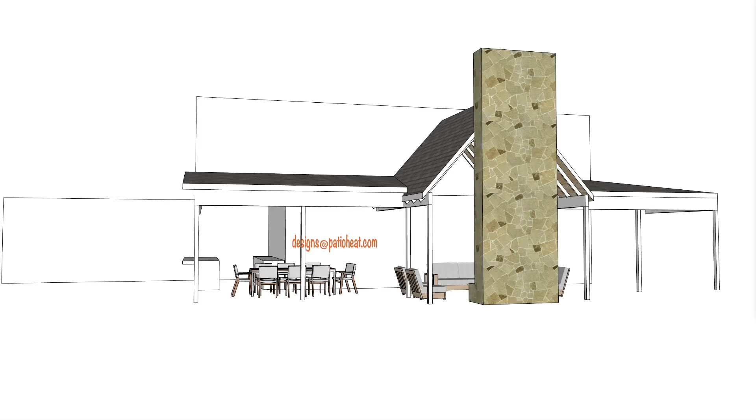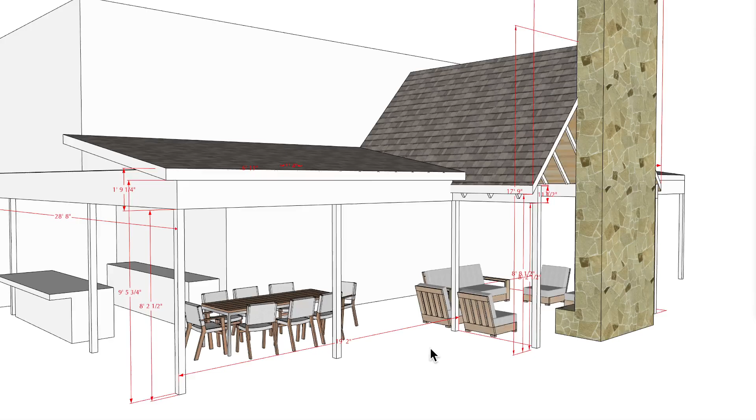Okay, so let's check out this particular application here. First, let's go into the overall dimensions. So overall dimensions I have, mainly it's 19 foot 2 inches from this outer post here to the outside post. I have a ceiling height here of about 9'5" and 3/4 of an inch rather. This section over here is 28 feet 8. However, we're not going to be heating up this space very much.

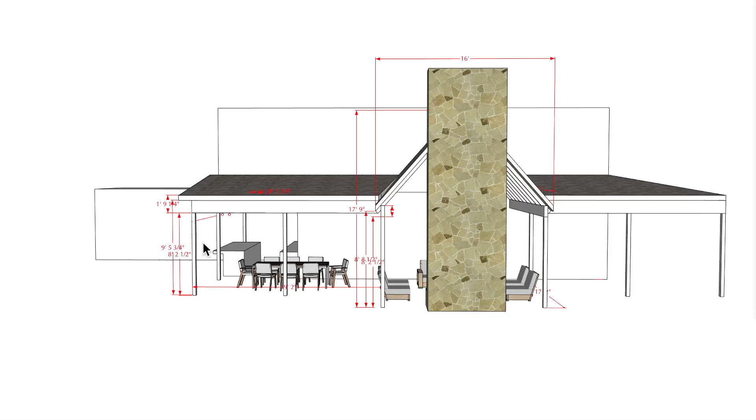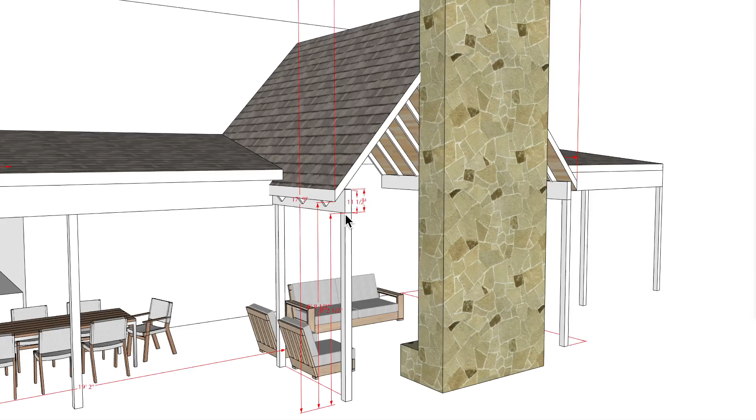We have 17 foot 2 from this outer edge here to the wall, and then we have a 16 foot section over here. Now there is some information that I received in reference to the height of the ceiling here. I have that at 17 foot 9 starting here. And then from this point here to the floor, I have that at 8 foot and 8.5 inches. Now, this dimension here is not going to be 100% accurate. However, I do have it about 12 inches roughly in height here. And I think that's about it as far as that is concerned.

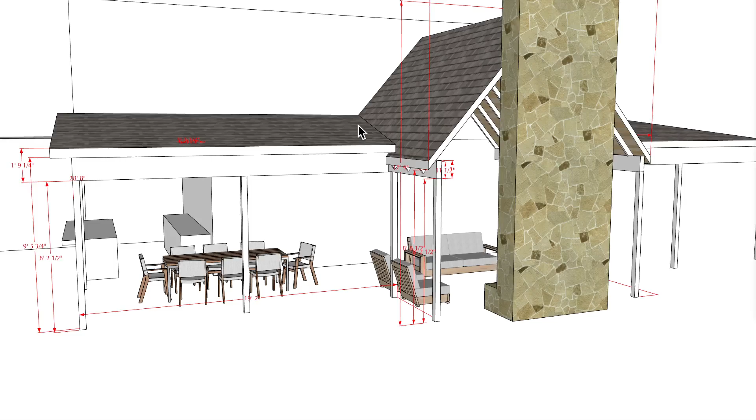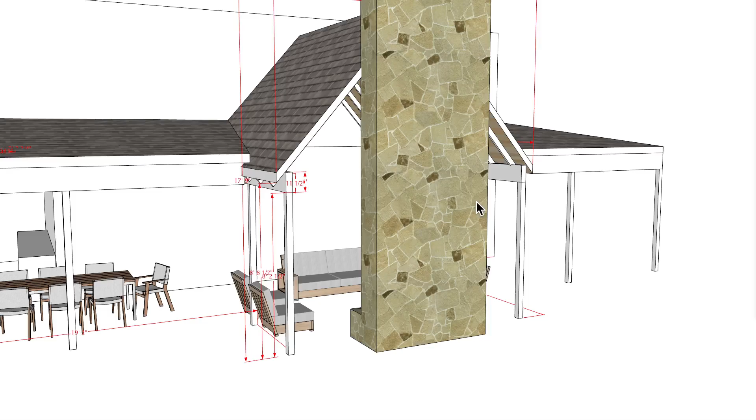Now, I think the beam will probably be pushed over to the left here a few inches and to the right over here a few inches. However, that's not going to make that big of an issue. The main part that we're going to be looking at is just the clearances around this edge over here. And let's go ahead and turn that dimension off and look at a couple of different options.

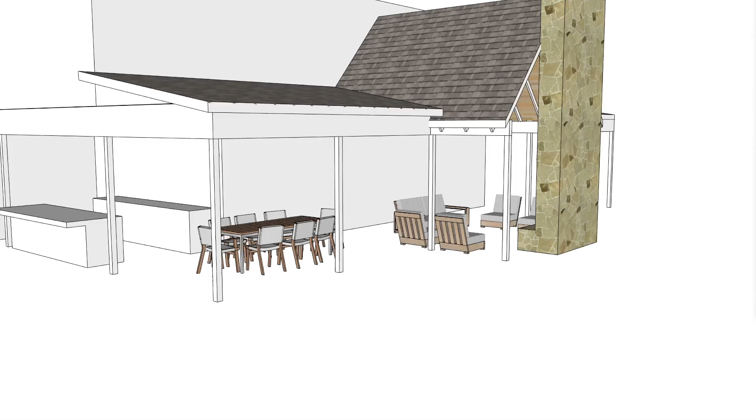So first of all, you can see that we have a seating area here that's casual seating. I have a fireplace sitting over here. We do have dining space over here. There's a bar over here, but we're going to look at that again as a future application. I'm going to remove the fireplace for right now, just so we can see how the heating system may work for this application.

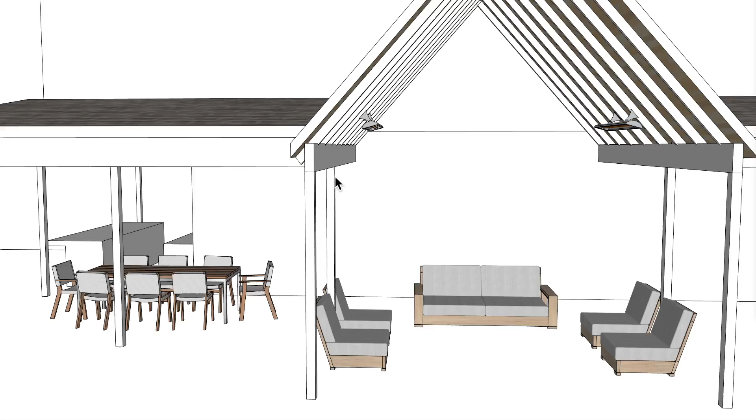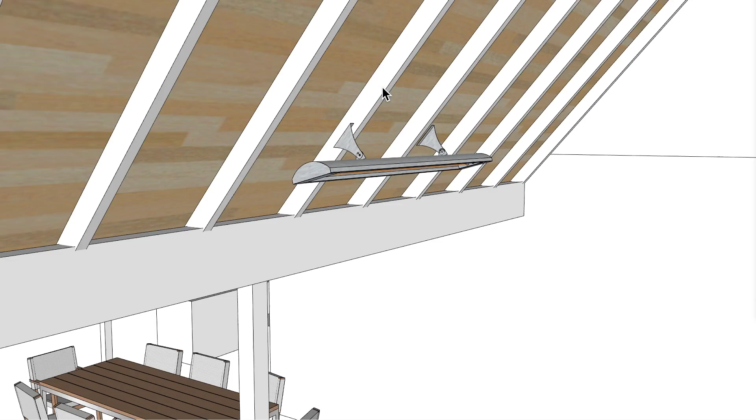So let's go ahead and look at one option that I would possibly recommend. And that would be two of the CD's 6024 6000 watt 240 volt 25 amp heaters, and I have them placed in such a manner. Now you can see that they're not attached to the ceiling joist here or rafter. However, I do have them in the same kind of position as the slope itself is concerned.

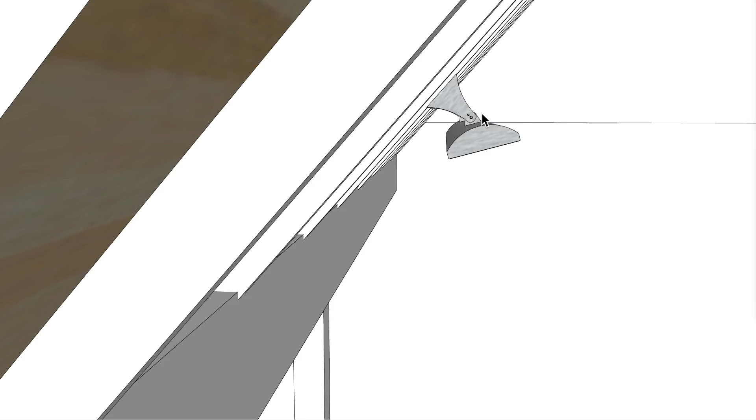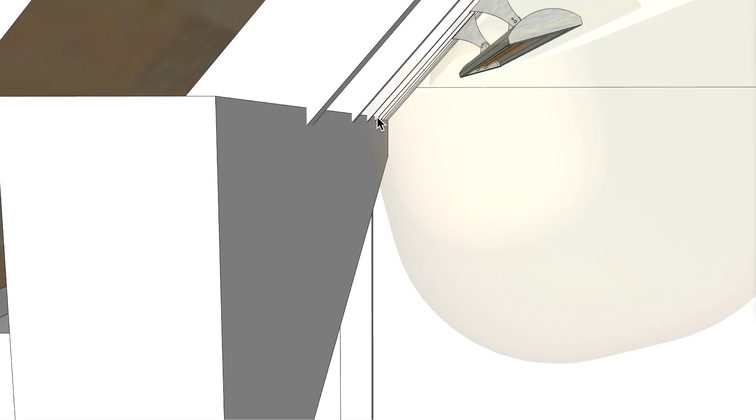We do need to make sure that we are meeting clearances above the heater. So we may have to use an extended bracket in order to accomplish that. If we looked at the clearances above, you can see that we're not 100% here. So probably a 2-inch extended bracket would be something that would work, as well as we do have a clearance below. And this is why I have it positioned in such a manner as to meet that clearance from this edge here to the edge of the heater. That's about it as far as that's concerned.

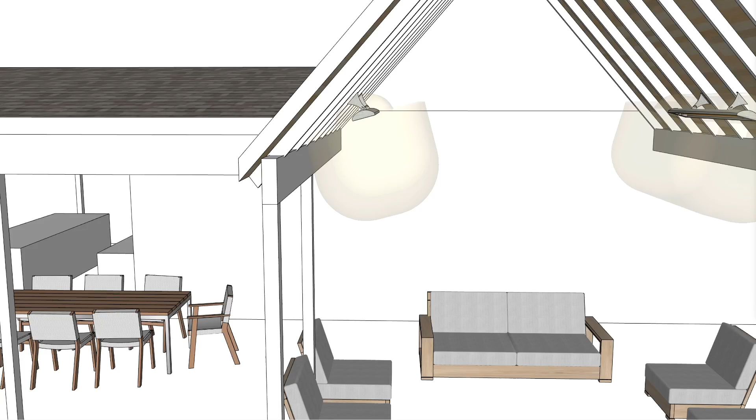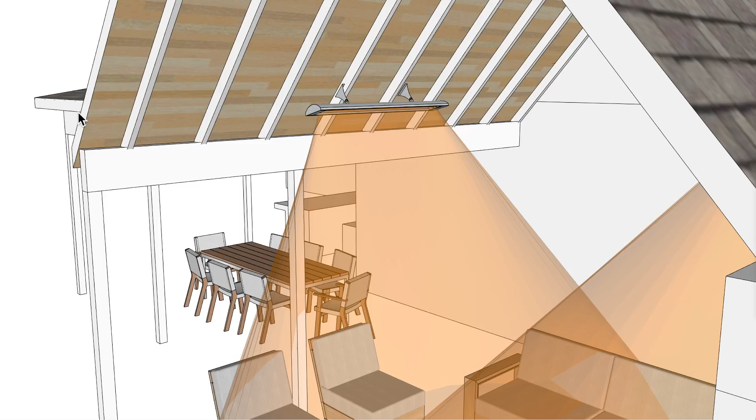It's not going to be 100% accurate here. However, I do want to kind of show what that footprint of heat would look like. So let's go ahead and do that first of all. And we'll maybe talk about the clearances a little bit in just a few minutes. I do have the heater placed from this edge here to the outer edge of the patio space at 5 feet 6 inches. And you can see that the footprint of heat would cover this space really well.

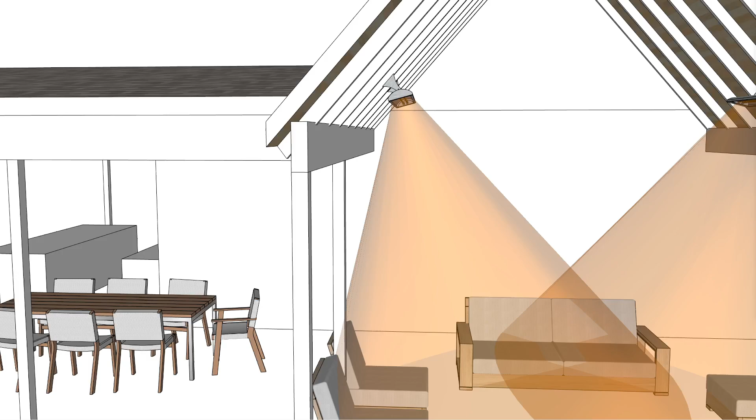Now, the other option would be to mount a heater on this edge over here. So let's go ahead and show that. And I'm going to leave the existing heater on there for right now, so you can kind of see where the dilemma actually sits. And that's where that is, so I have it mounting on a vertical surface like this.

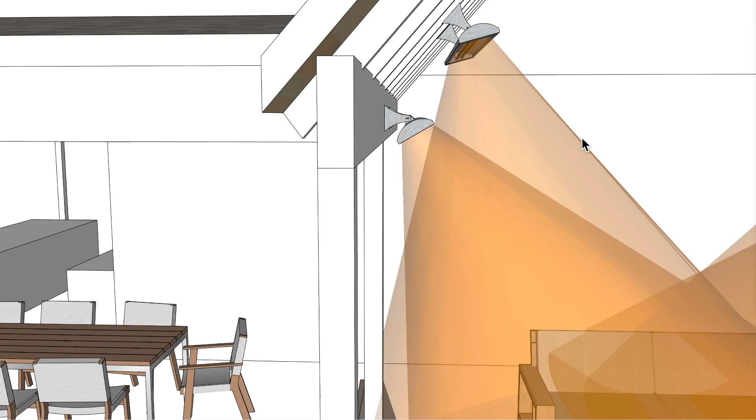And you can only change the angle a maximum of 30 degrees from straight down 30 degrees up, or if you looked at it from this point of view, straight out 65 degrees down. And you can see the coverage isn't 100%.

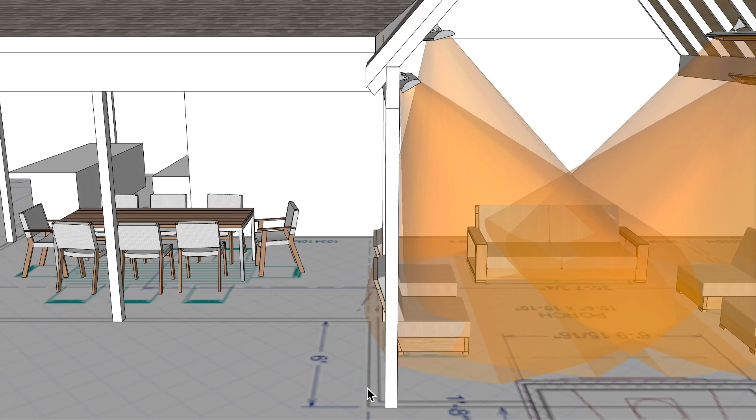Again, if I looked at the floor plan, let's put that on here real quick. So the floor plan, you can see that I believe that these posts are going to be over about 3 inches. What I did is I matched this up here to the floor plan itself, so I think it's going to actually be pushed back a little bit, and these ceiling joists will probably be a little bit different, so this angle is going to be slightly different.

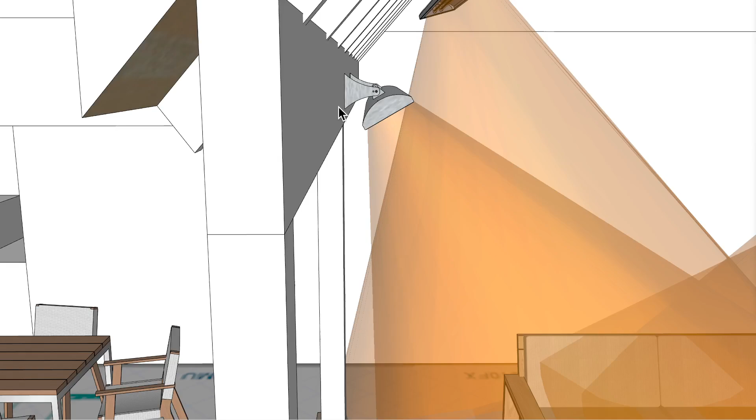But if you looked at this, and if you mounted it on a vertical surface like this and you changed it to 30 degrees from straight down out, then you need to maintain a clearance above the heater at 12 inches. Would this clearance be met? And let's look at the clearance below the heaters.

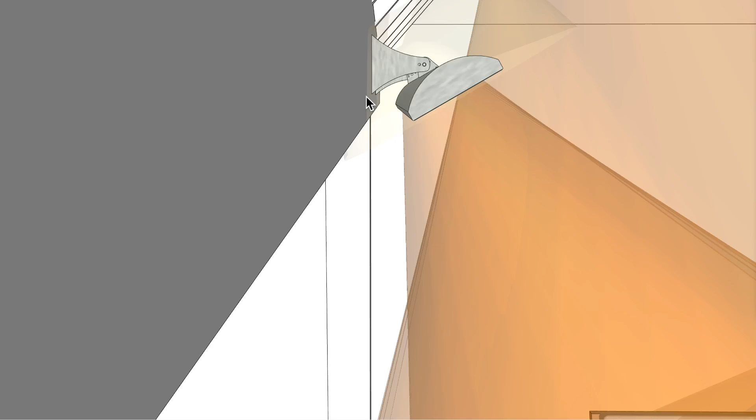So this is what the manufacturer states can be done. Vertical surface, 30 degrees from straight down over, and if this was a wall, that would still be legal to go ahead and place that, or it would be meeting the clearances that the manufacturer recommends, I should say. So this beam wouldn't be a problem, nor would anything else other than the fact that we need that 12 inches of clearance above.

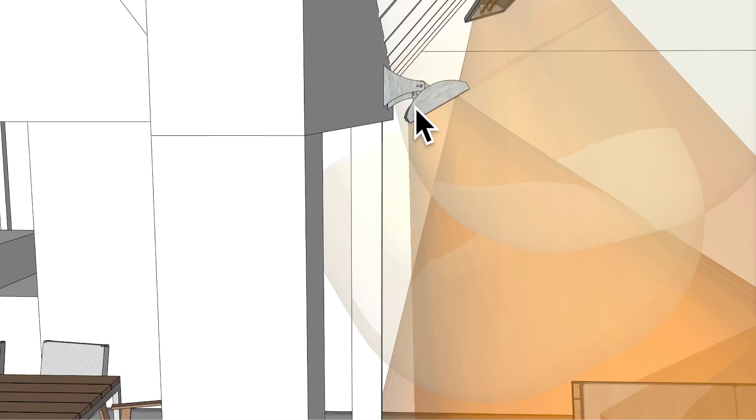And if I looked at the lower clearance area, I'm going to turn off the top. You can see that, again, with this mounting like this and the manufacturer's recommendation, this should be accomplished with no issue whatsoever. But you can see that the ray itself from this heater versus this heater isn't covering this space on the outer edge as much as I would like. So that's kind of why I like this a little bit better than this, but this probably looks a little bit better than this one over here does.

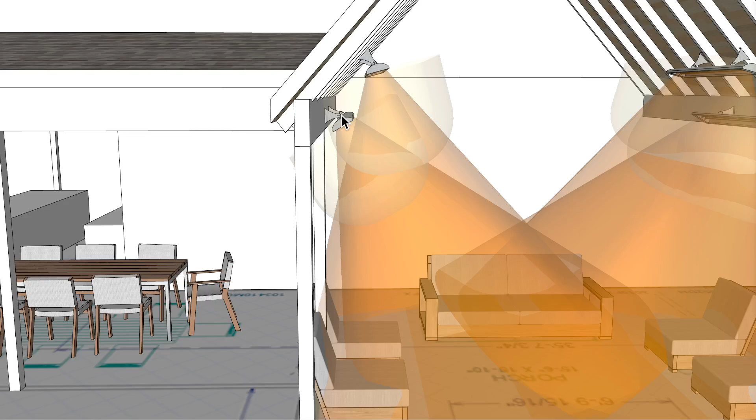So let's go ahead and turn the first option off so you can kind of see what that overall footprint of heat would be. So I would say that this position would be good, good, okay, okay, and this would be fine, great for this application.

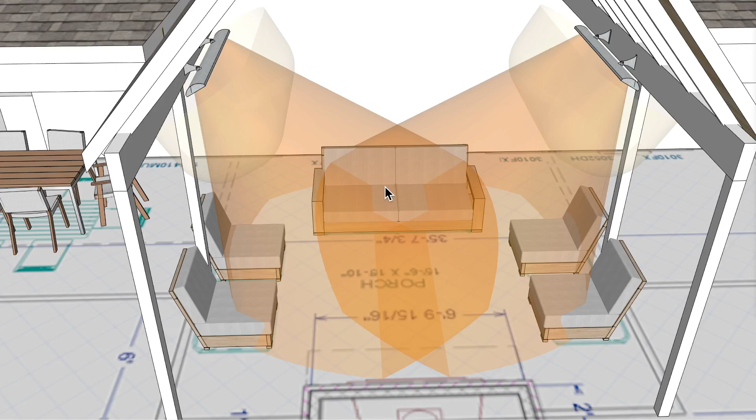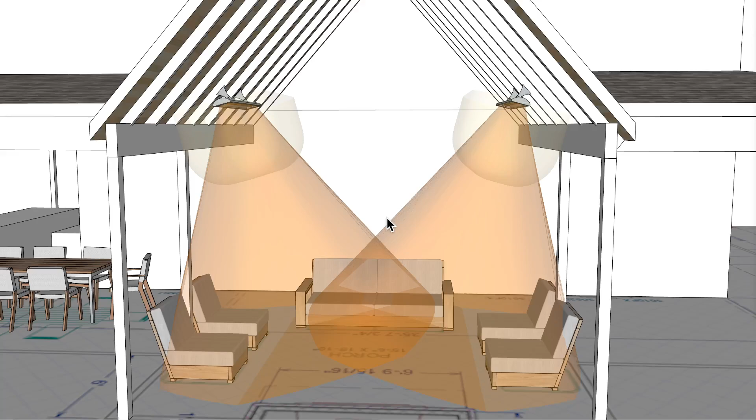Going back to the other option, you can see that the coverage is much better over here and over here, and the overlapping area is a little bit less, which would probably be a more preferred footprint of heat for what I would recommend. But that, again, is going to be based on, do you like this positioning here, or would you prefer it on the existing beams over here?

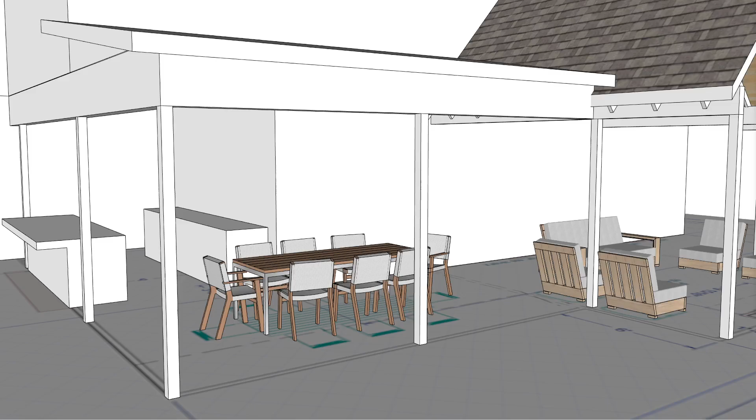All right, well, let's turn that off and look at the other option, which would be heating up the table position over here. Let's go ahead and put on the flush mount units. So these are going to be flush mount 6,000 watt units, and this would be ideal for this particular application.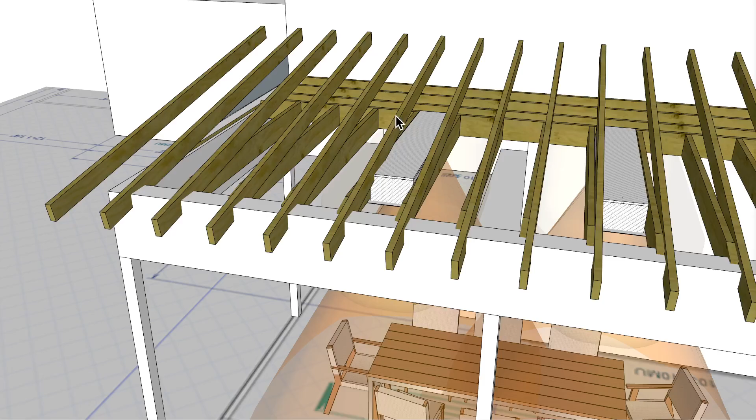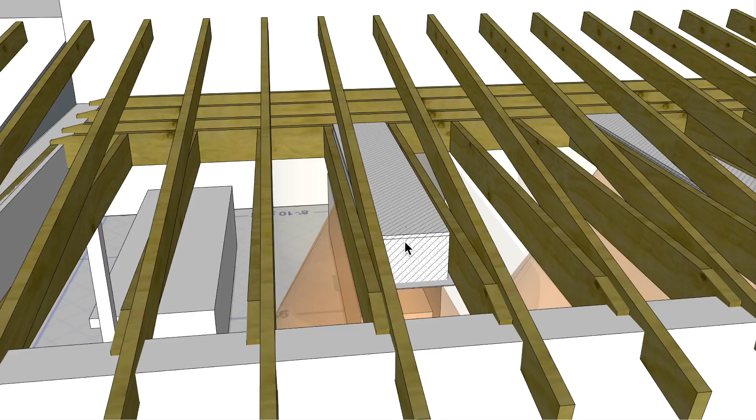However, we have one other issue that we need to address, and that is how are these ceiling joists positioned. I have these ceiling joists, these are 2x8s, and I have these at 16-inch center to center. So if this was accurate as far as the ceiling rafter part of the joist, and I'm sorry if I'm mispronouncing that term, but that would fit in here just fine. You need 13 inches of space from this edge here to this edge here, and that should be fine with regards to these lower joists here.

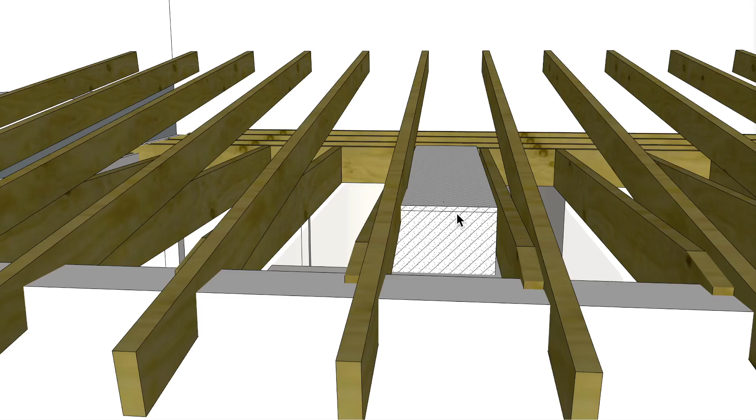However, if the rafter system is sloped like I have it, that might become an issue. So you can see that we're now not meeting all the clearances here. So, what could we do in order to achieve this? I'm not 100% certain of the distance between these ceiling rafters or ceiling joists here, here, and here.

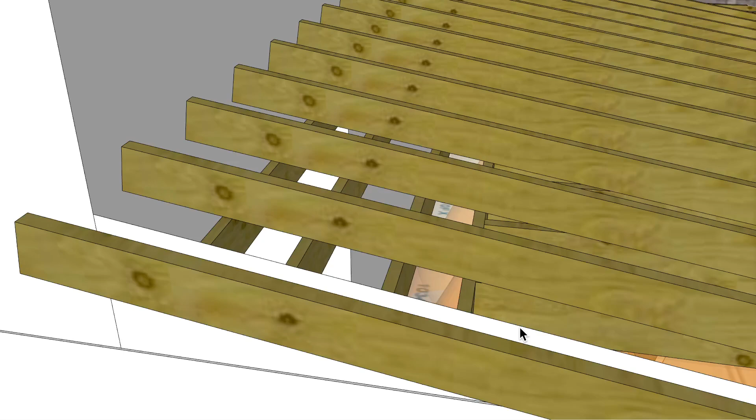Let's go ahead and see what I do have. Let's go over here and just measure this out from this point here to this outer edge here. So I have that at 3 foot 3 3/4. I'm gonna go ahead and turn that off.

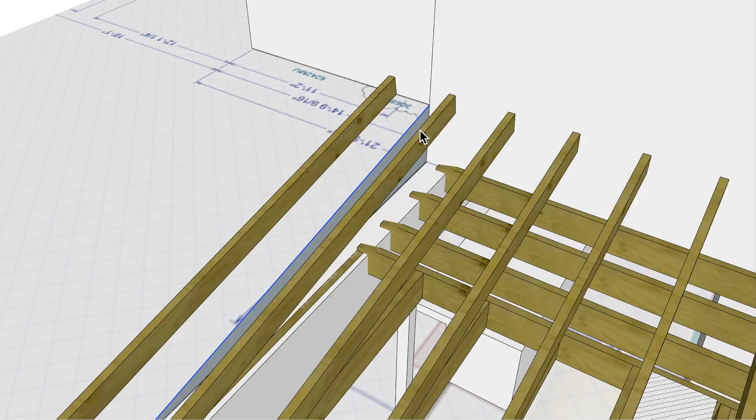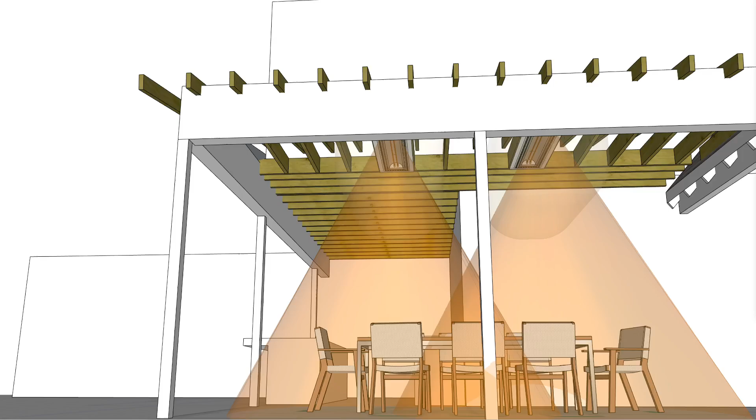So if it's a little closer than that to the wall over here, then this might be okay if the ceiling rafters are at this particular angle that I have them. However, if they're not, then we can come up with a different option. But as far as the distances apart that I have them at, let's go ahead and mark that up here. You'll see that I have these from center point here to center point here at 5 feet 4.

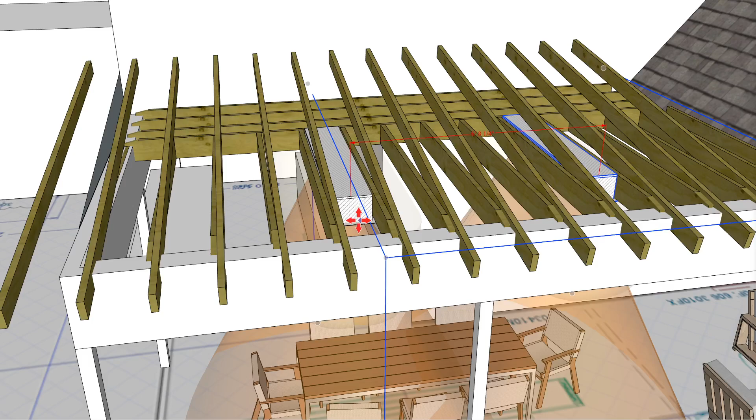Now I probably would like them a little bit further apart. So let's go ahead and try moving that over from this point here to this point here, and we'll move this one here from this point here to this point over here. So that's at 8 foot center to center, practically 8 foot 1/4 inch. And I think this would be good overlapping. So that would probably be my preferred, rather than what I showed at the very beginning there.

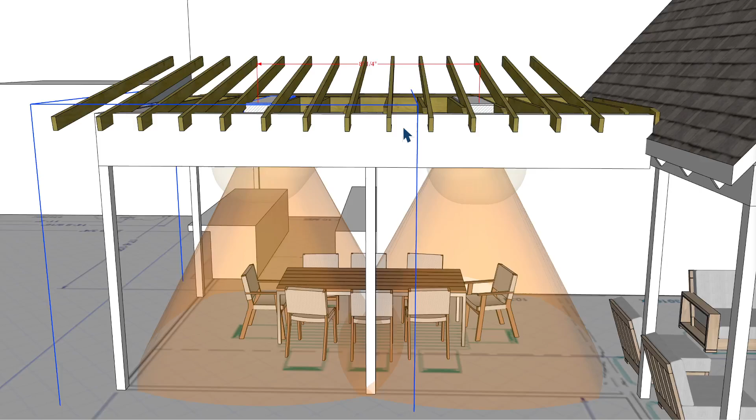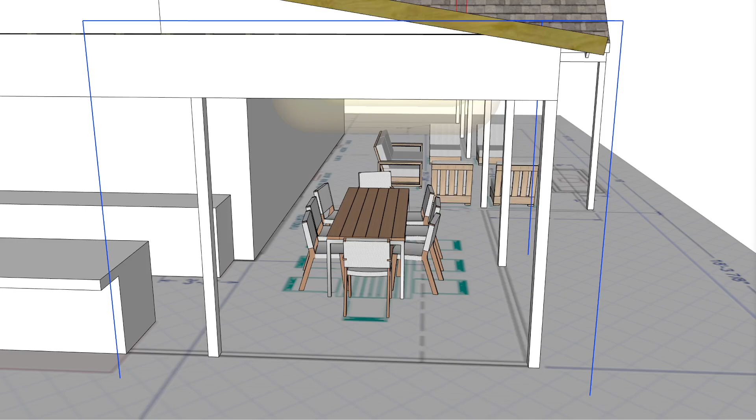The other display I had was too close to each other and a lot of overlapping, so I wasn't too happy about that, but this would be very good. I don't think there's anything else I want to talk about with regards to this. Let's go ahead and turn off that ray and look at one other thing in reference to the flush mount kits. I'm going to turn off the clearances below and go with whatever type of material you might be using surrounding the flush mount.

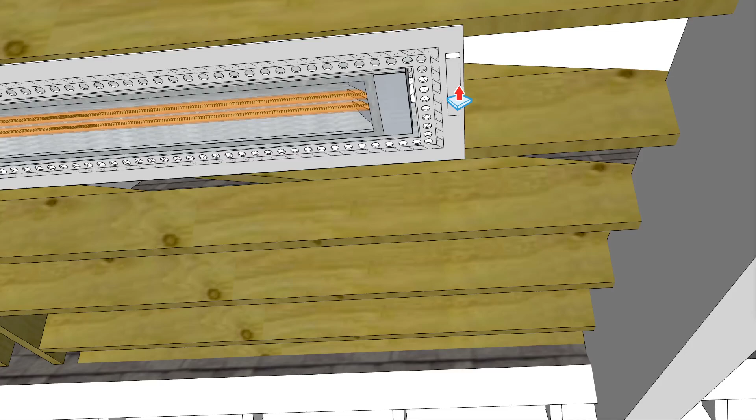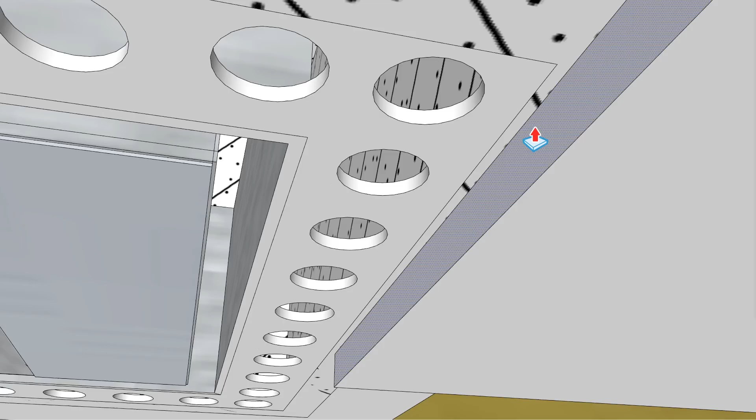So this is going to be the ceiling, let's say, and let's just say that it's going to be a stucco finish, so maybe a 1/2 inch depth on that. I'm going to pull that over here a little bit. So let's just say this is a stucco finish. What you want to do is make sure that the stucco finish is up to this edge. Let's see if we can accomplish that here. So up to the edge of the ventilation holes here, and then you need to make sure that it's 1/2 inch away.

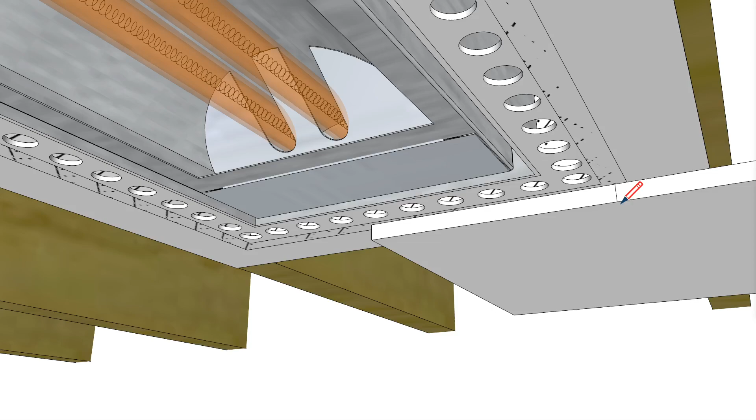I like this because once this is covered like this, the flush mount kit itself isn't exposed as much, and it just looks like a much better application as far as the overall coverage. I'm going to just put a line here for right now, and then you can see that we can pull this, and that would be kind of more of the finished ceiling over here.

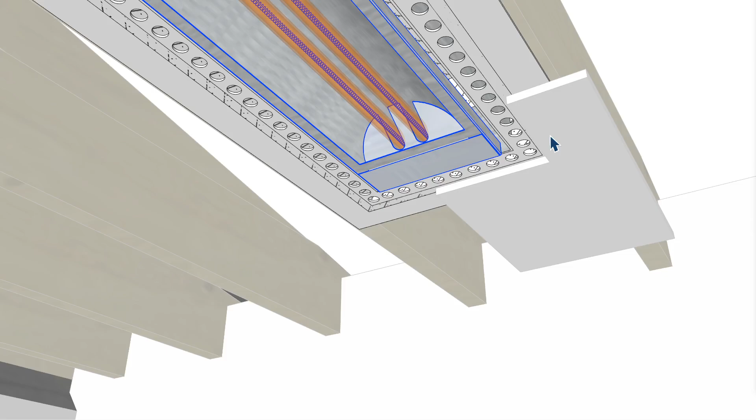Now if this is a wooden finished ceiling, or any type of combustible material, then you want to make sure that the heater itself is at the same elevation as that combustible material. So I just drop that down 1/2 inch based on that height that I see there. So that's just for information in reference to placing a flush mount kit on a ceiling regarding combustible or non-combustible ceiling type. I think that's about it for that.

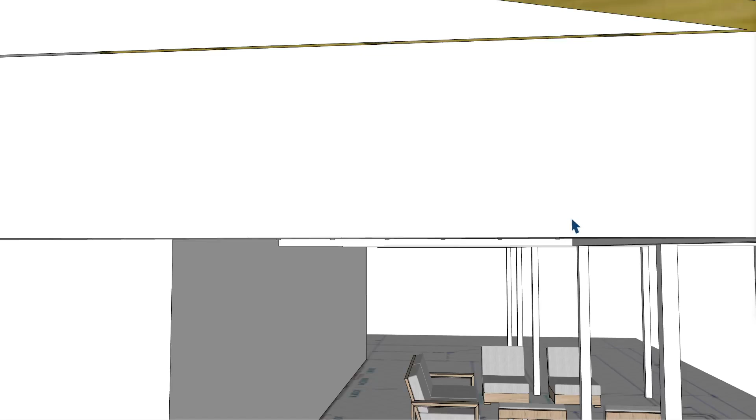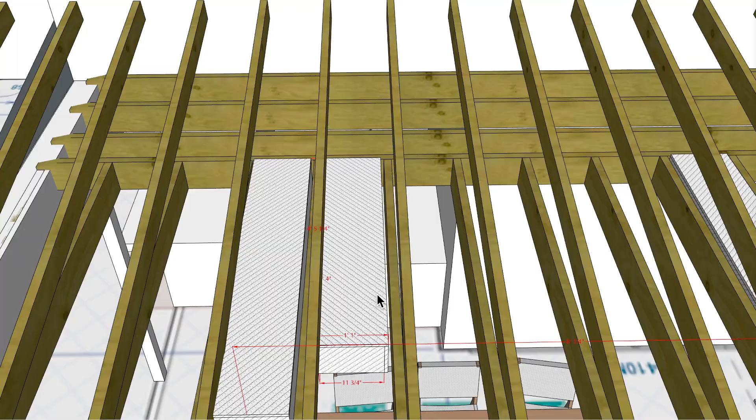Now what I'm going to also do is show you, if that distance doesn't meet up, what else we can do. So there is a separate unit here, so I'm going to put that in here. So this is going to be the WD5024 flush mount with a flush mount kit. Now I don't have this whole unit designed. This is a new unit that Infratech has just put out.

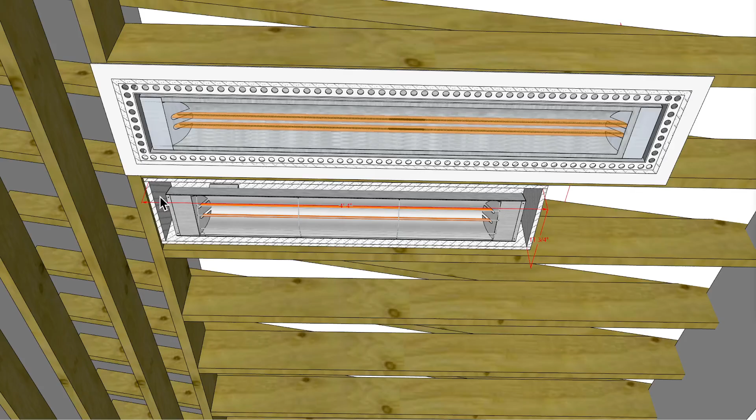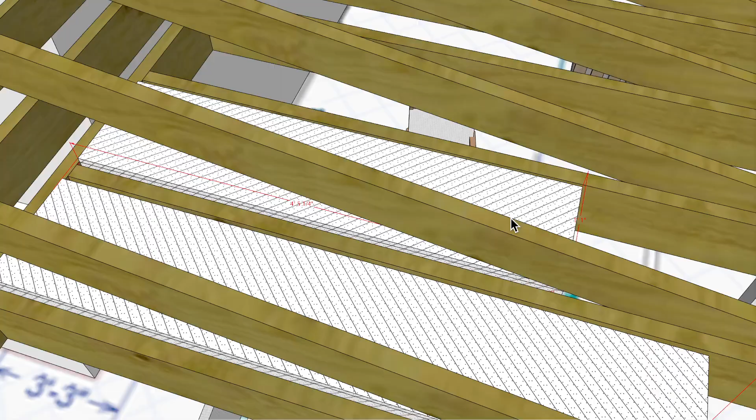What I want to show, however, is that the flush mount kit itself, inside edge to inside edge, is 4'4", and the outside edge to the outside edge is 4'5 1/4", left to right. And then of course there's 13 inches across, and that's true with this one too. That would probably be a more beneficial application if these ceiling joists are in such a manner where you cannot meet the clearances over here.

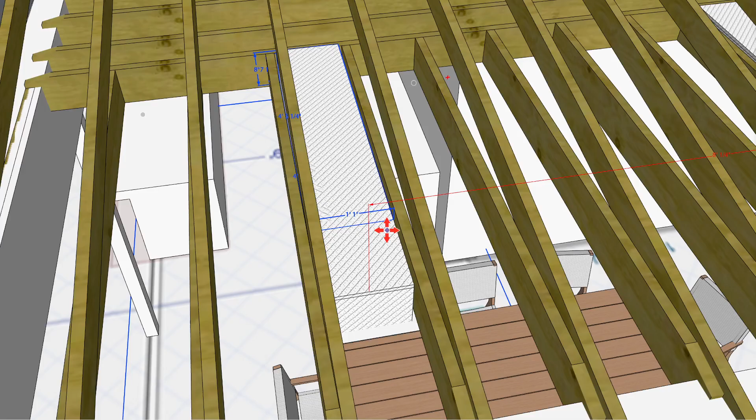So I'm going to go ahead and move this one over as well, and we'll go ahead and place it something like this, and I'm going to actually add one more to this location over here.

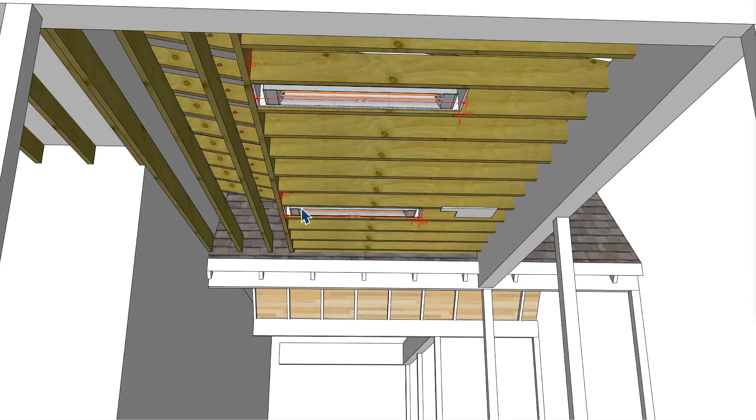And I'm going to turn off the other ones here, and we'll go ahead and look at now what the footprint of heat would look like. So the footprint of heat, and you can see that they're shallower or not as wide here. The footprint of heat is going to look very similar with regards to what we saw before. So again, the footprint of heat would be accurate for this particular application here.

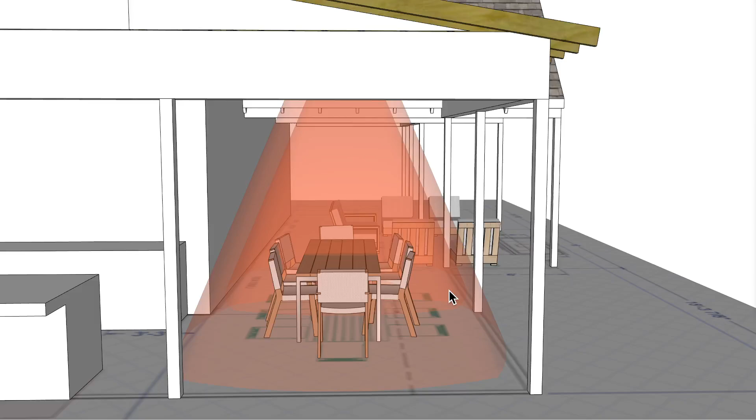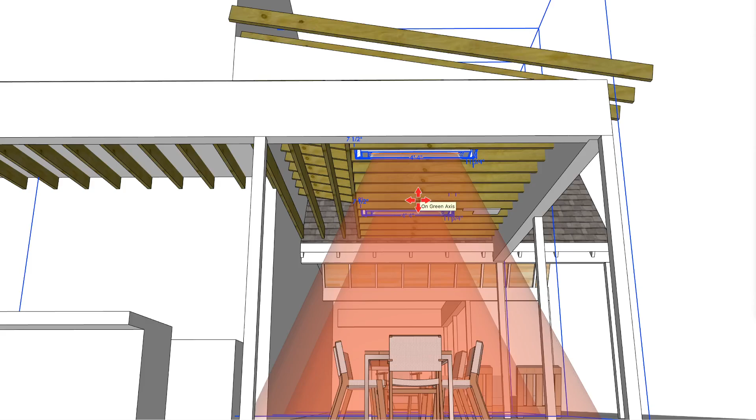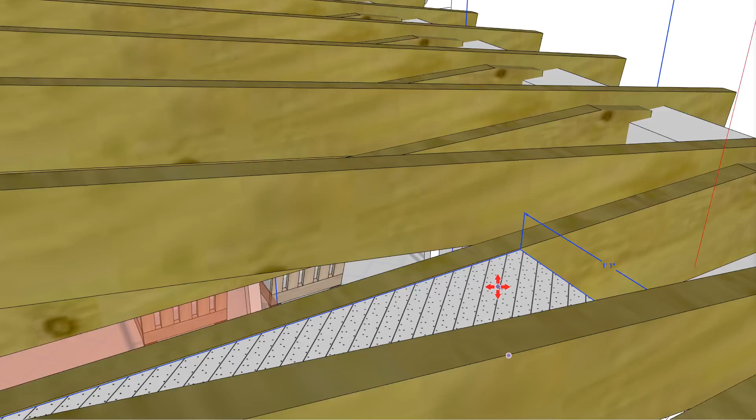The other thing I should also mention is if you can move the units slightly over to the right based on the true dimensions that are actually there at the site. Maybe this position could be moved to the right just slightly, maybe 2 to 6 inches, something of that nature, and more centrally located between this wall here and the inner edge of these beams here. So it's just something to think about, that that could be done, as long as you're still meeting the clearances to this position here with regards to the ceiling joist.

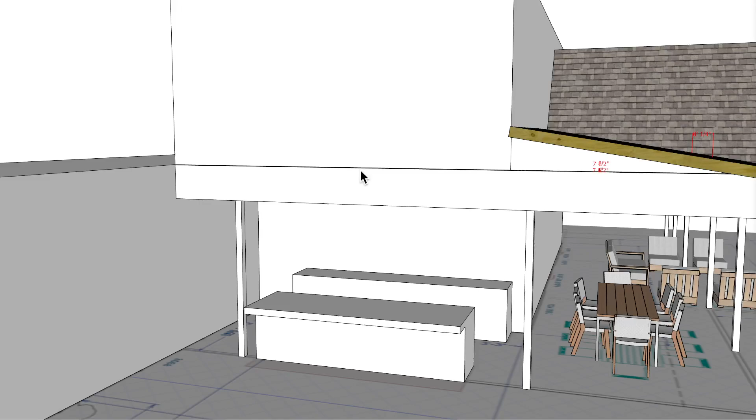So all right, that is going to be that recommendation, and I'm going to go ahead and turn off that ray. And for the final application, they are talking about placing a unit up here somewhere with regards to having a future top installed over here. And so what I've done is I just made something that looked like what they showed in their image, and then I placed a slimline unit over here.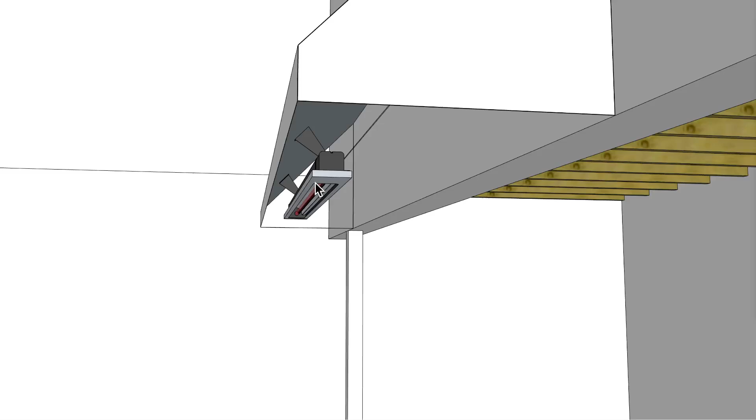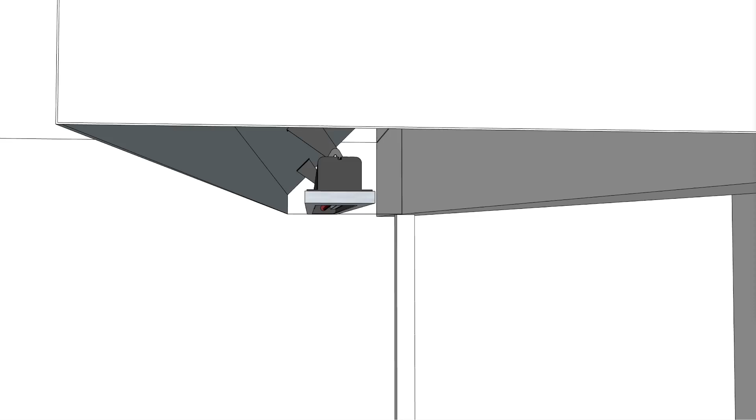Now if you do have a slimline in something of this nature, I placed it so that the bracket itself is on the ceiling section, and you need to make sure that you have 6 inches of clearance from this edge here to any combustible edge over here. My particular drawing here isn't 100% accurate in that right now, but this is kind of more of an idea what would work. You could place it on this beam over here, but you'd be shining that beam of light more in this direction, which you're gonna absorb most of the heat into this section.

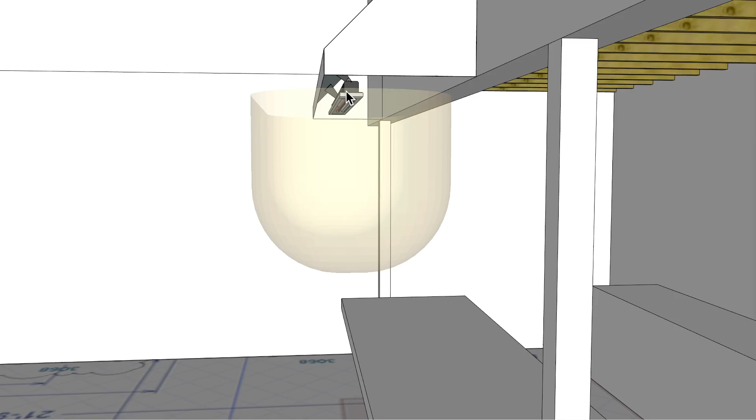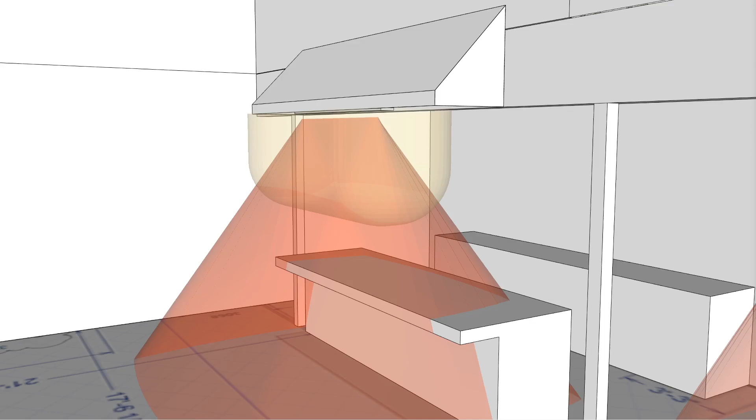And when you put it on a vertical surface like this, then the maximum tilt on a slimline is 45 degrees, so straight out 45 degrees, and that ray would really be penetrating over here more than right below the actual ceiling over here. So let's go ahead and look at the footprint of heat. And there's our footprint of heat with regards to the ray. I have it just centered within the patio structure or the bar structure here, and I think that would be something that would work out fairly decent.

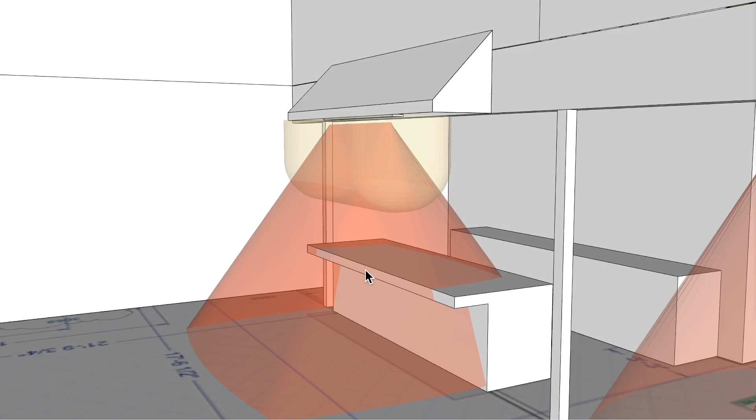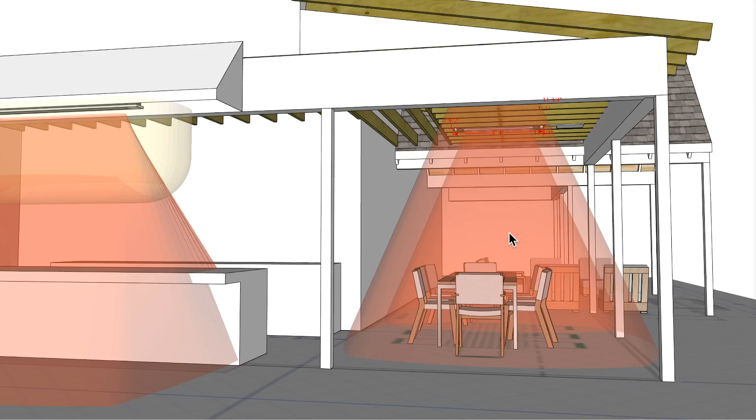You might want to use a 3000 watt or a 4000 watt with a control. The 3000 watt at the bar stool seating height is probably more accurate, but on colder days you might want a little bit more heat, and that's why I'm saying if you do use a 4000, to go with a control system where you can actually dim this heater down a little bit to make it comfortable for different times of the year. And that's really true with the 6000s that I showed over here too. I would probably go with controls on all 5 units if you in fact put all 5 units in, even if they are the 5200s versus the 6000s that I showed at the very beginning.